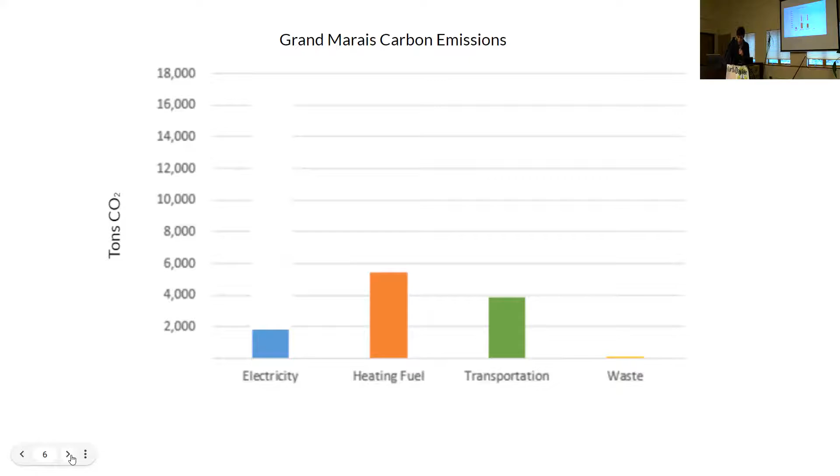So now, what is the city doing? What actions are we taking in those two sectors? This next part's almost going to be like a preview to a movie because I don't have enough time—you get just a snapshot of these programs. If you have any more questions about them, come find our table. We're right next to the giant soil and water conservation district over there. Come find our table and get more details.

The strategy the city's taking is, again, leaving decarbonization to SMMPA, and we're focused on electrifying transportation and heat, and increasing efficiency. Increasing efficiency saves our utility customers money as well as reduces demand so that we don't have to produce that much electricity.

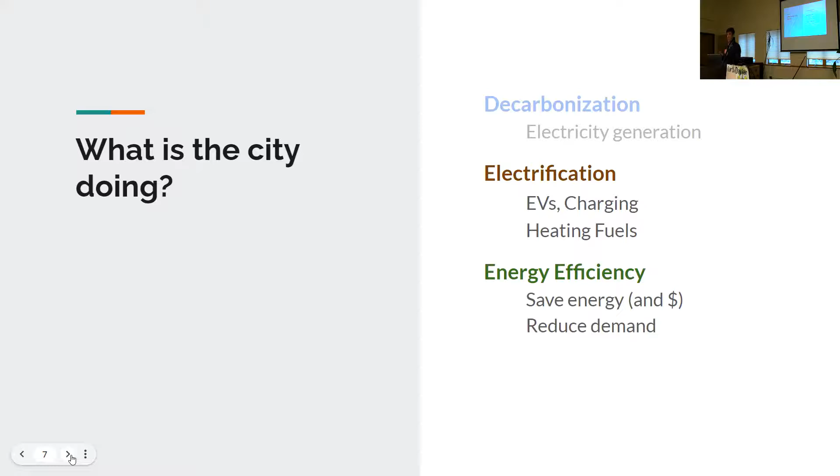A couple things you've probably seen around town are EV charging stations. We have the only DC fast charger—the big white one—on the North Shore. These went online July 2021, so not quite a year, and we've already had 700 charging sessions, and the city's collected $3,500 in fees since then.

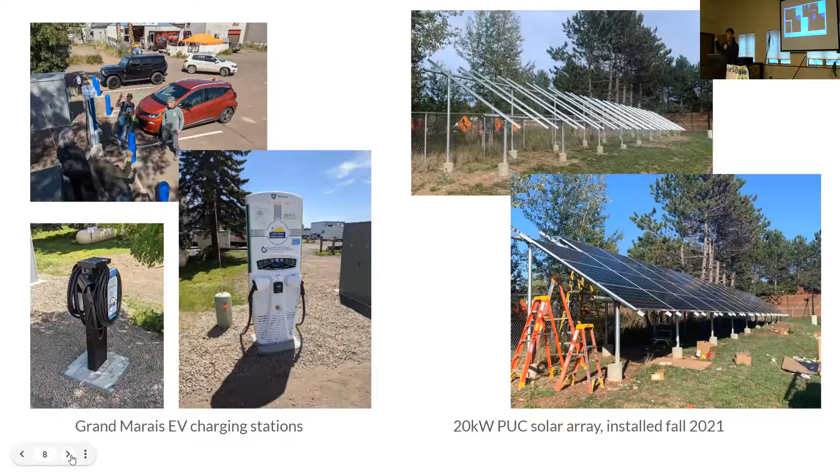And then coming soon, not quite ready yet, but keep watching your Wednesday afternoon utility meetings, PUC meetings. We're working on a home EV charging rate, and this is to reduce demand. If you can imagine a time in the next few years when we have lots of EVs on our system, if everyone follows patterns, comes home, plugs in their EV all at the same time, we have this huge spike in demand, and that spike is not good for a grid that we're trying to make renewable. So this rate would allow for cheaper charging overnight, but more expensive charging during the day. Cheaper off peak, more expensive on peak. So keep watching your PUC meetings for when that's rolling out.

Here's a program that you can participate in right now. Green power purchasing is a way to offset your electricity use with renewable energy certificates. It's almost like buying a little bit of a wind turbine, or investing - in this case it would be like a rivet or a screw. You're not getting a whole blade here, but if enough people go in and invest in renewable energy certificates, it really does make an impact on expanding renewable energy.

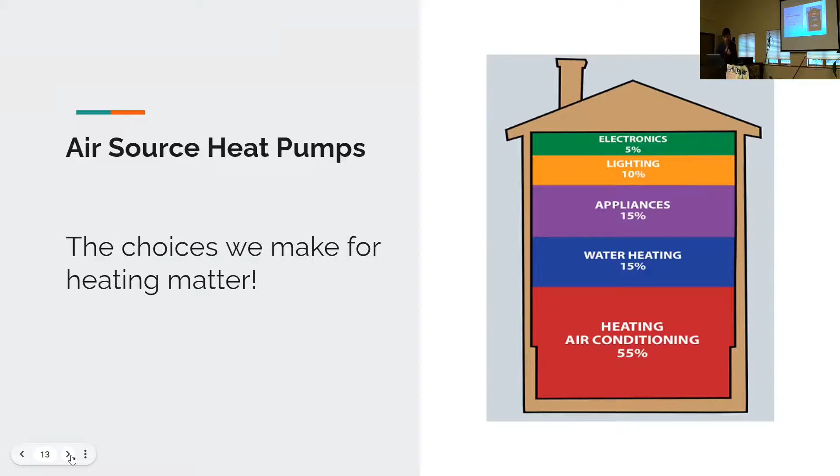Air source heat pumps are a technology that is getting more and more efficient over the last few years, and it's basically like an air conditioner that can work in reverse. It efficiently heats and cools by moving heat back and forth. So in the summertime, when you want it to cool, it can take heat from inside your house and move it outside. And in the wintertime, it can pull heat out of the air and bring it into your home. It can do this down to 5 degrees if you have a cold climate air source heat pump. That does sound silly to say that an appliance can pull heat out of 5-degree air, but that's what this technology can do.

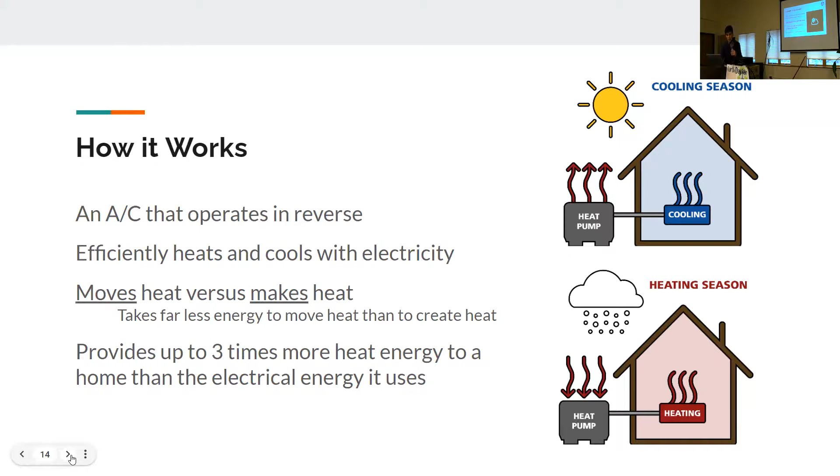And below 5 degrees, you would have a backup heat source - say your current furnace or baseboard heating, whatever you're currently using as your heat - that would kick in and supply you heat so that when it is 20 below, you still have heat and you're not relying on something that can't pull heat out of the air. But these cold climate air source heat pumps can provide heat down to 5 degrees.

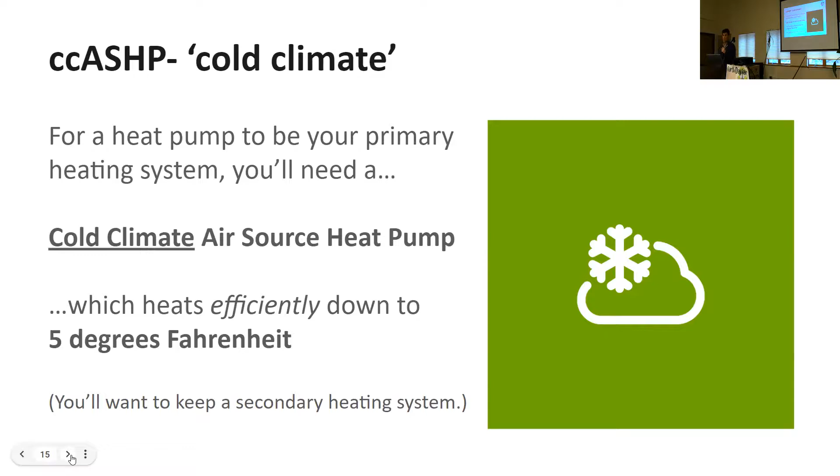So what do they look like? They fit in almost any home. If you have a furnace and ductwork in your home, it's basically like an air conditioner condensing unit. They install it outside your home, integrate it into the ductwork, and use the furnace fan to distribute the heat.

That cost is more of an estimated range. To get an actual quote, you would need an installer to come by, figure out the size of your home and how much energy you use, and then you can get an actual quote. But just to give you an idea, this is not a $30,000 investment, and it's not $500 either. It's a few thousand dollars.

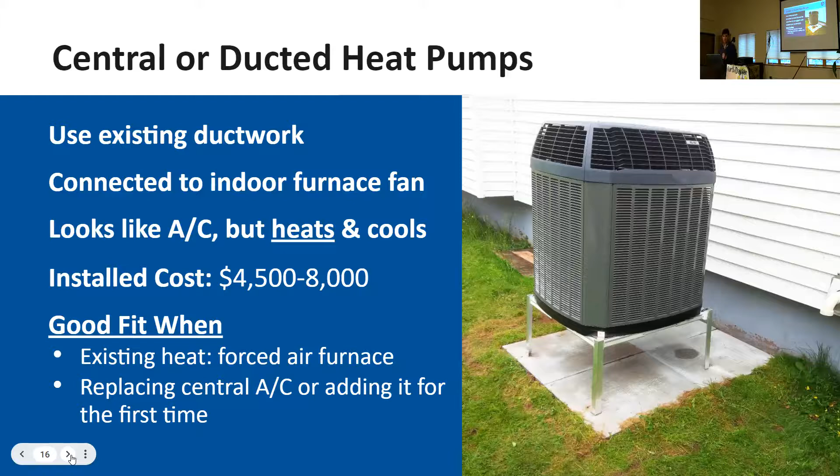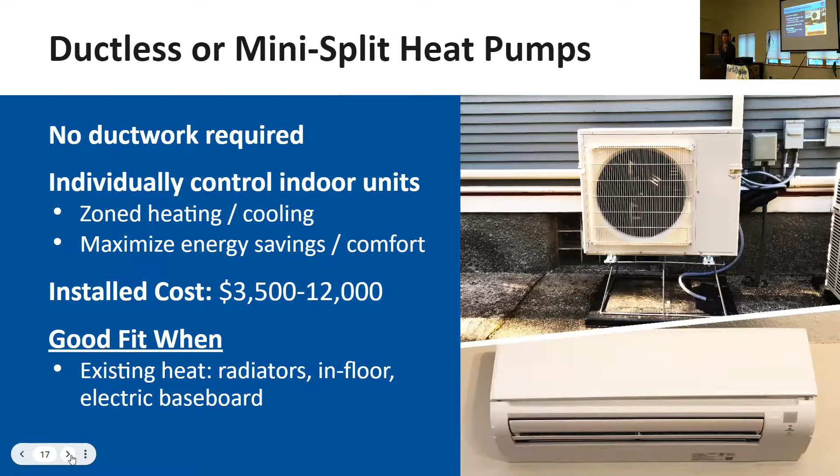So what kind of efficiency are we talking about? How much energy can you save, and how much can you save on your utility bills? People heating with resistance baseboards can save 55% on their electric bills, and people heating with a propane furnace can save 30%. Again, these are just estimates—you'd need an installer to tell you exactly how much you can save, but the savings are significant.

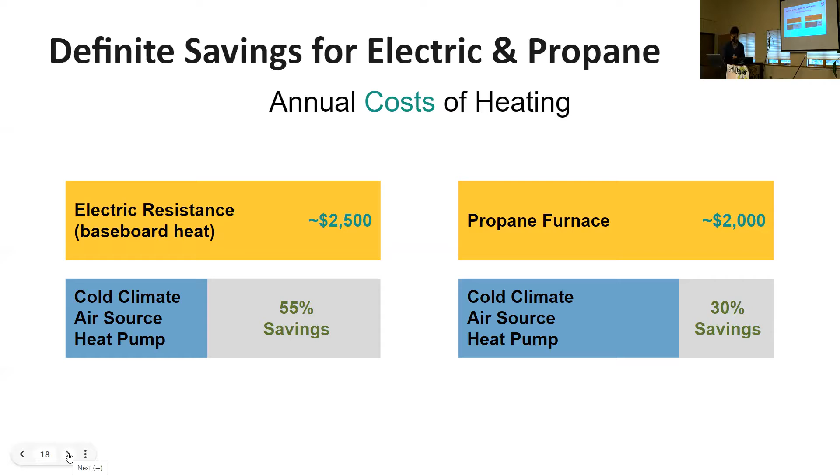If you'd like to learn more about heat pumps, there are a couple of resources to write down. The Clean Energy Resource Teams have a table out in the hall. They have stories on their website and educational info—in fact, I stole a bunch of my slides about heat pumps from CERTS, they gave them to me. So check out CERTS for more educational info.

And we have one of those installers here today. Twin Ports Custom Climate has a table out in the gallery. They're a Superior, Wisconsin-based heat pump installer who've been putting in heat pumps for a long time. If you're interested in learning more, they can answer technical questions. They brought a heat pump with them—a mini split—so you can see the size, and their technician is super knowledgeable and can answer your questions.